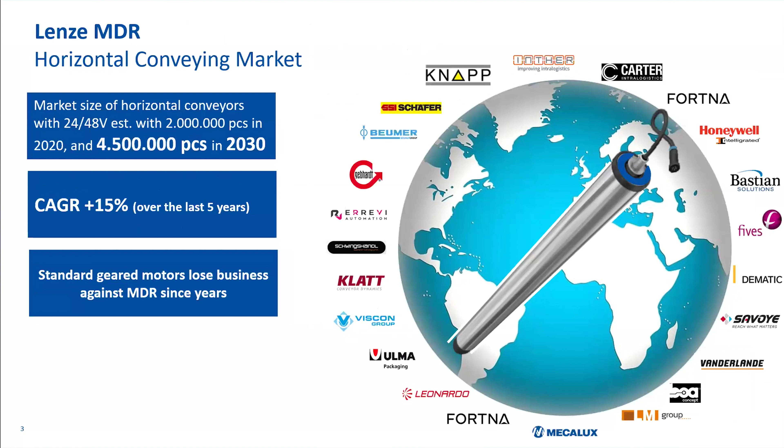Today, we're going to go through market opportunities, some product features and benefits, different applications and how to identify them, and sales tools. Throughout that, Steve and I will take you through a couple different product segments. I'm going to start us off with one of Lenze's newest product segments, which happens to be the MDR, the motor-driven roller. From a market standpoint, we see very large volume with this market.

In 2020, there were roughly 2 million pieces in the 24 to 48 volt horizontal conveying market, and that's expected to grow to 4 million or 4.5 million in 2030. So good growth, 15% over the last 5 years, and it's been taking more and more business away from standard geared motors. So we'll go through why that is and why Lenze decided to make an MDR in the coming slides here.

So the roller market, why do we see that it's growing so fast? There's a number of reasons. First, the intralogistic, the material handling market is growing significantly. And as that market grows, the need for more and more rollers is growing with it. Second, when we take a look at the power that's needed in that less than 200 watt range, DC is cheaper than AC.

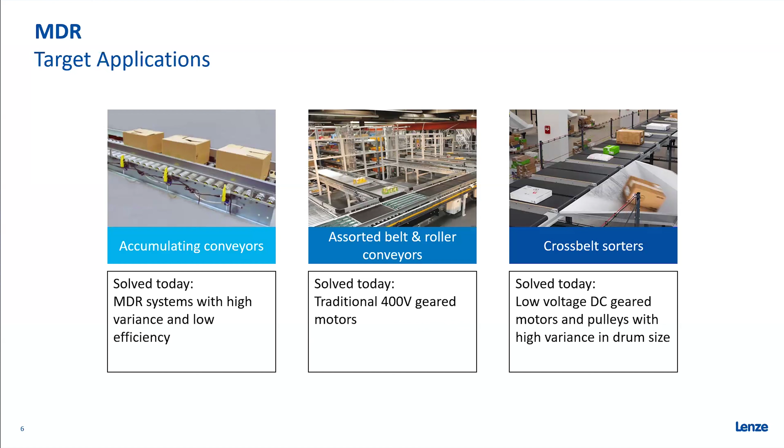For applications, there's a number of applications out there in warehouses currently. The first on the far left here, accumulating conveyors. These are currently solved with MDRs, but they have a high variance and they're lower efficiency than the Lenze MDR. In the center, you'll see assorted belt and roller conveyors. Today, that's solved with AC geared motors. They typically need higher power than what MDRs are providing in the market today.

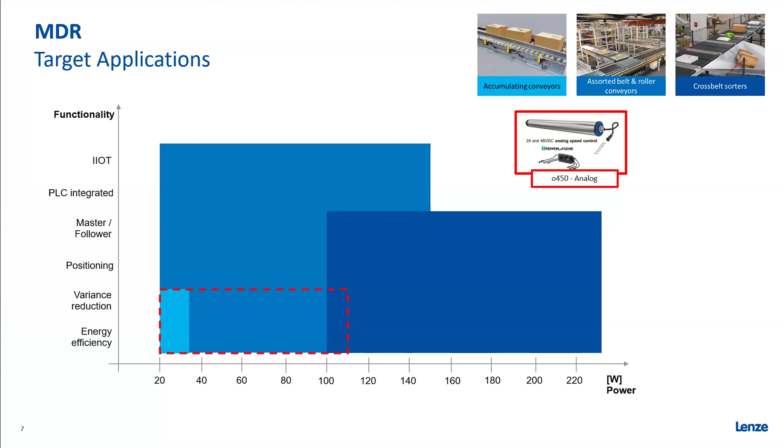And then on the right, cross belt sorters. These use low voltage DC geared motors with pulleys and a high variation in the drum size that's needed. Where we see the market going, kind of 2 steps with this. With the first release, Lenze will have an analog MDR. This will take over. We'll be able to use it for accumulating conveyors and some of the assorted belt and roller conveyors that are out on the market. So between 20 and 115 watts in applications where we're looking to improve energy efficiency and reduce the variance.

In the future, we'll also have a digital version of the Lenze MDR with its own control card. In this case, we'll be able to target more of the market where we can target the cross belt sorters and more of the belt and roller conveyors that are out there. So we'll go all the way up past 220, 230 watts of power. And from a functionality standpoint, we'll be able to have positioning, master follower, PLC integrated, and IIoT functionality.

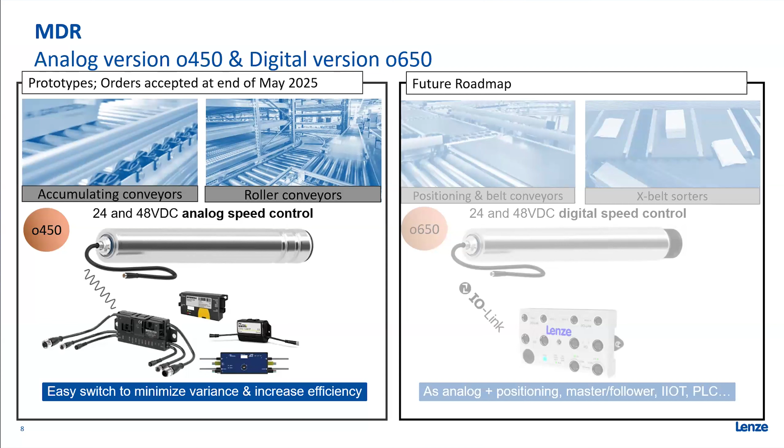Taking a look right now, we mentioned the two versions. On the left is what's going to be available soon. We can get prototypes out to customers for testing at the moment, and we'll expect to accept orders end of May 2025. We're providing the roller, and it's able to be used with control cards that are currently out on the market. Most that use an M8 connector would be compatible, but we can always take a look and make sure that they are compatible.

The future roadmap, the o650 on the right has the Lenze control card, and there'll be more on that as we get closer to the launch of that product.

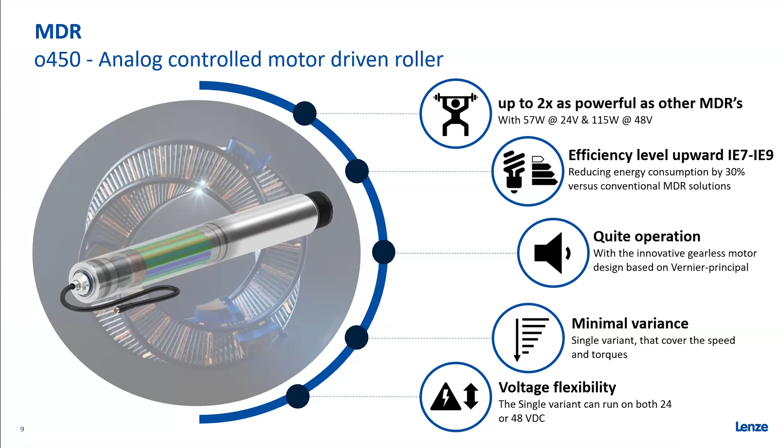For a final feature benefit for the MDR, we'll see up to 2 times as powerful than other MDRs out on the market, 57 watts at 24 volts, 115 watts at 48 volts with high efficiency. You can reduce energy consumption by 30% compared to other MDRs out on the market.

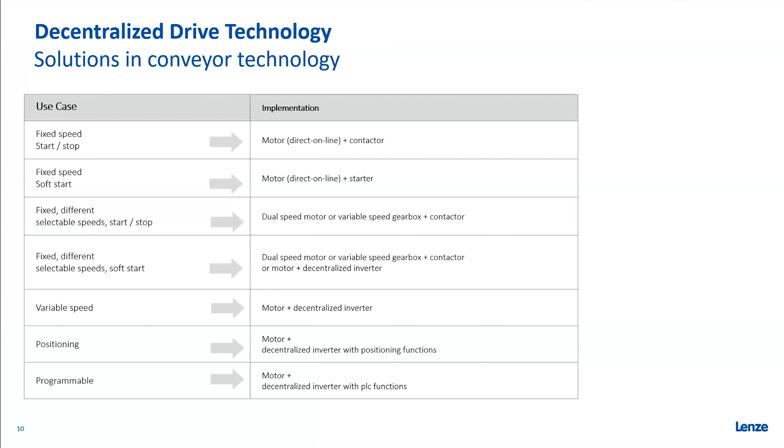And one of the more unique features is the quiet operation. It's the first thing that everyone seems to notice when you first install them. They're much quieter than what's currently out on the market. And finally, minimizing variance is probably one of the biggest benefits. We do that by having no gear, and then also having the flexibility for one roller to operate on either 24 or 48 volts.

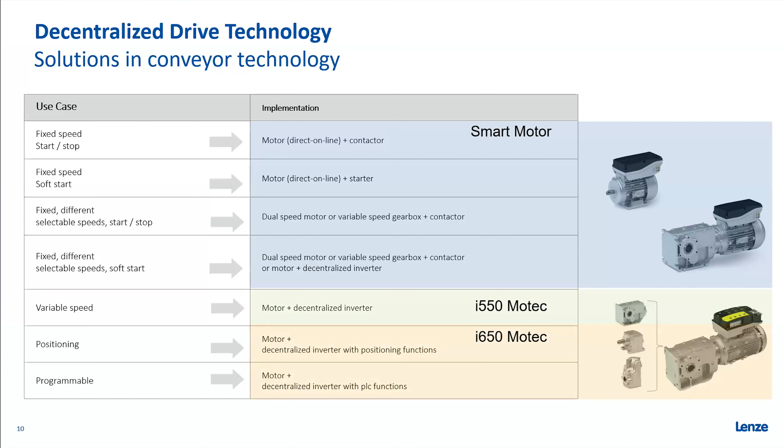Moving on, there's always more applications out there where MDR doesn't fit. So now we're going to shift to AC motors, VFDs, and Lenze's decentralized drive technology. From a use case, we'll take a look at the simple horizontal conveying applications out there where you have either fixed speed with start stops or soft starts, or a few selectable speeds. These are very good applications for the Lenze smart motor, made to replace things like soft starters or simple applications like that. And it was designed specifically for horizontal conveying.

As we get more complex, we have full VFDs that can get mounted to the motor or near the motor with our i550 Motec, which would offer variable speeds. And then i650 is a future-looking roadmap, which would offer positioning and programmability.

A little more detail on the Lenze smart motor. You can see that it's built directly on the motor. The motor supply is 400 to 480 volt AC, and we're going to utilize 3 digital inputs and 1 digital output. So you can have 5 different speeds that are set with the Lenze smart motor. You do this with either an Android smartphone, NFC using an app, or with a laptop connection. So very simple to program.

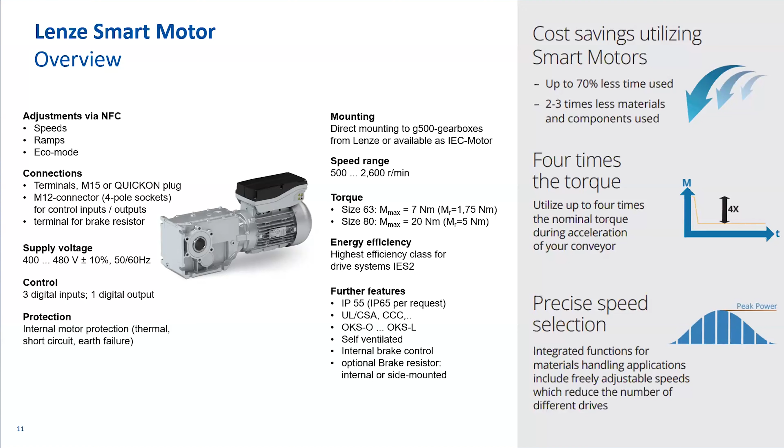We'll see that we can get a reduction in the variants with this as well. Using just a gear motor, you typically change the gear ratio to change your speeds out. This allows for simple speed adjustment and accel/decel adjustment without making different variations and stocking different gear motors.

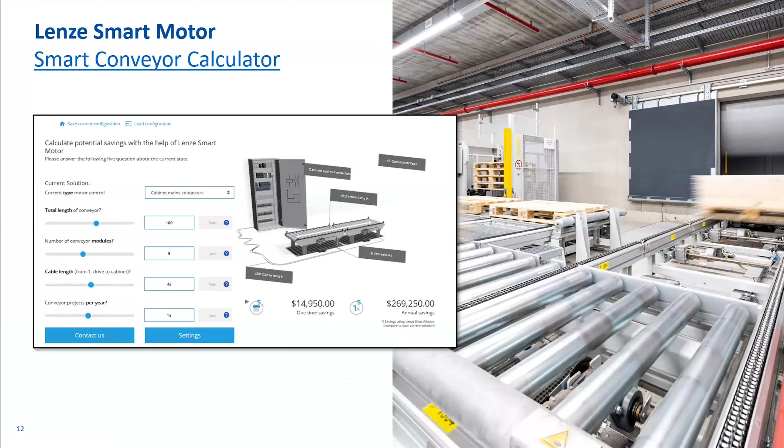And probably the biggest advantage of the Lenze smart motor is its 4 times starting torque. It's perfect for horizontal conveying when you're putting boxes on and taking them off. The starting torque is always where you need the most torque. It allows for a very compact package. The motor can be smaller than comparative motors without the smart motor on there.

We do have a smart conveyor calculator that's available on the Lenze website. It allows for a quick and easy calculation to see what cost savings you may see by utilizing the Lenze smart motor over what they're currently using. If you go to the Lenze website at the top for online tools, the smart conveyor calculator will take you to this page where smart motor flyers, manuals, mounting instructions are located.

And toward the bottom, you'll see the cost savings calculator with a few simple selections here. We can see what's currently used with either mains contactors, soft starter, or a frequency inverter. And then the total length of the conveyor, number of conveyor modules, cable length from the first drive to the cabinet, and then the number of projects per year. We can quickly see an estimate for one-time savings and an annualized savings.

That gets broken down into your drive concept. We'll see a negative here. Upfront cost of the smart motor is slightly higher than what's currently used, but we'll see a cost savings with power distribution, automation, the electrical cabinet, engineering costs, and structural costs. All of these details are under the settings tab.

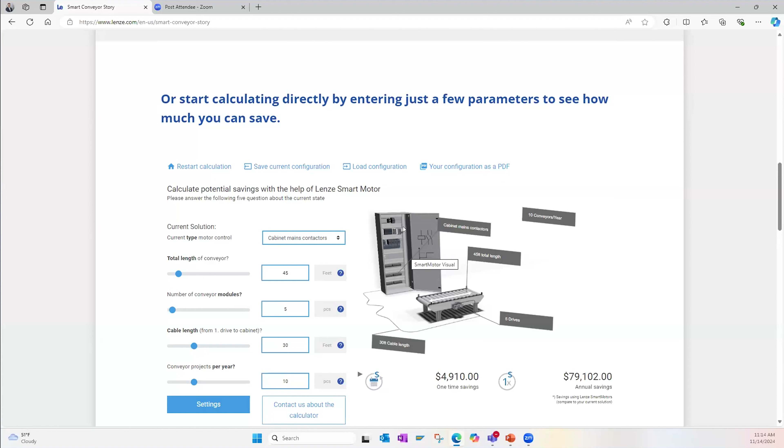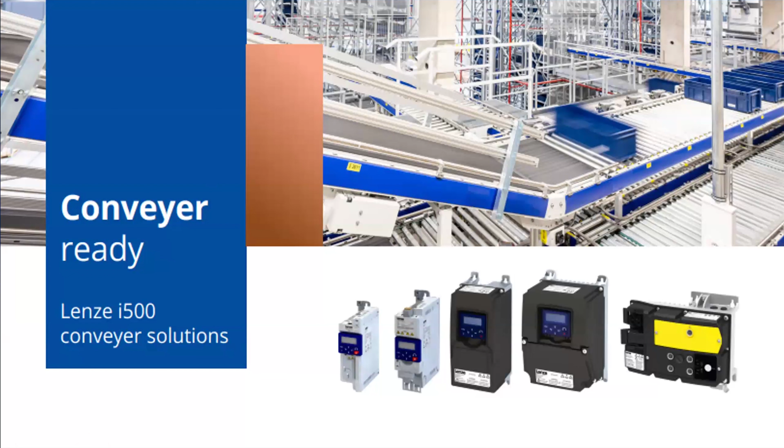We click on there. For each one of these, we can fine tune for a specific customer. What's the cost per hour for an electrician, the time to wire a motor, time for final testing. So for each one of these, we get into the details of the gearbox, the motor that's currently used, and so forth. And we can come to the cost estimate to see, does smart motor make sense for the customer? So one of the many tools that Lenze offers here to show the benefits of our products.

With that, I'll shift over and hand it off to Steve, who will take us through some of the VFD solutions we have for conveying. So we're going to quickly talk about our suite of VFDs and some features of these that are specific to the conveyance applications. So starting with our general portfolio, I'm sure many of you are at least familiar with these, if not intimately familiar, or at least aware of these product variants.

This is our whole i500 line of products. So starting from the left, we have our cabinet drives available up to 150 horsepower constant torque, 175 horsepower light duty or variable torque. The Protec in the middle, our premier decentralized product, gets mounted near the motor on the machine outside the cabinet. We provide that up to 100 horsepower. And the newest member is the Motec on the right side.

And that is in this photograph here, that's the wall mounted version, but we can put that on the motor. And we're making that Motec up to 60 horsepower wall mount, up to 30 horsepower motor mount. It's completely connectorized, decentralized, so really quick to apply in the field, quick to move, quick to replace if necessary, and really so far been very well accepted by the conveyance industries.

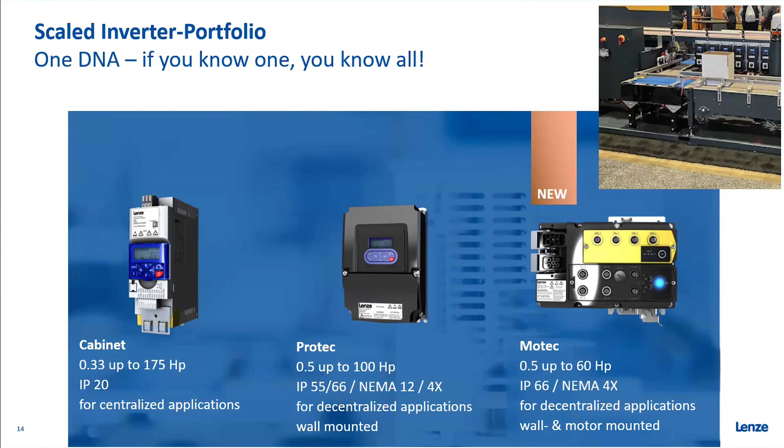Got a photo up at the top there, in the top right. We were at PACK Expo last week, and it was just a great showcase for a lot of our products that a lot of conveyor OEMs are using. You can see there a bunch of those Protec drives lined up for this sample conveyance application at PACK Expo, and that's really where the bulk of our portfolio for the conveyance industry are, in these decentralized products. So the Protec, like pictured there, but also the Motec.

And recently we've had some success with the Motec. We've gotten listed on the GM or General Motors specification with the Motec, as well as Amazon and Walmart. So if you have machine builders in your territories that you distribute to that build machines for Amazon, GM, or Walmart, you may get requests for Motec or Protec for those OEMs or those machine builders to meet the customer requirements there.

Just a brief description of what's the difference between these three series of products. So starting from the left again, those are cabinet drives. Have to go inside a cabinet. They're IP20 rated. They are modular, as you can see here. The control units are separate from the power units. You can easily apply different field buses to different power units, and it minimizes what you have to stock, and you can easily put something together for a particular requirement very quickly from your stock. Zero clearance mounting, side by side with no spacing, very compact, very efficient.

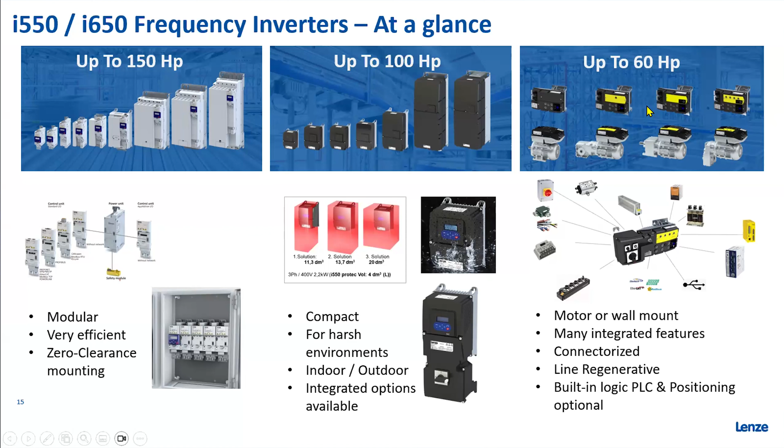Moving to the center here, we have the Protec that's available up to 100 horsepower. Still very compact, but it is outside the cabinet, machine mount, indoor, outdoor rated, very harsh environments. There's UV inhibitors in that plastic. It's a polycarbonate, so really robust and really great for harsh environments.

And again, over to the right, that's our Motec. And you can see up in the images at the top, several variants of the standard Motec, and then also the motor-mounted Motec. As I said, we'll be doing the motor-mounted version up to 30 horsepower and the wall-mounted version all the way up to 60 horsepower. Again, completely decentralized and completely connectorized.

Some of the features that are common throughout that entire product line with regards to conveyance. All these products can, of course, operate AC induction motors, open loop volts per hertz, open loop vector, closed loop vector. We can also control synchronous permanent magnet motors, open loop. All these products can provide 200% peak torque for starting for 3 or 4 seconds, 150% torque for 1 minute.

We offer a plethora of field bus connectivity. All the main modern Ethernet-based field buses, EtherCAT, EtherNet/IP, Modbus TCP/IP, PROFINET, as well as some of the legacy serial-based field buses like CAN, Modbus RTU, and Profibus.

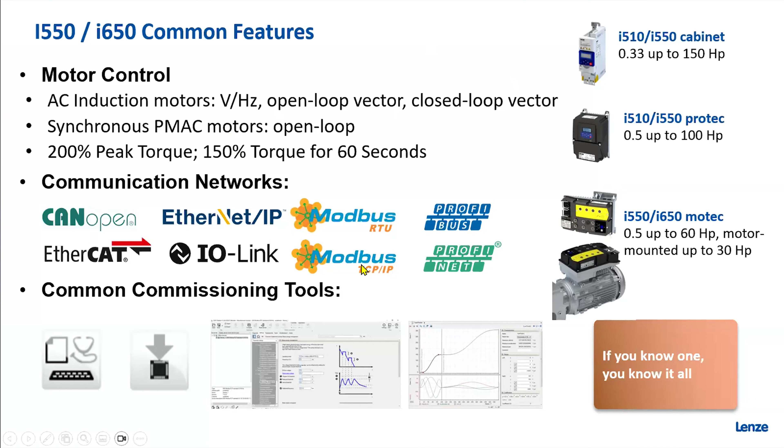Although these products look entirely different, they all use the same commissioning tools. They all have the same addresses or indices. So if you did start using our cabinet product, way back in 2016 when we launched it, and next week you decide to use a Motec for a particular application, even though it's brand new, it's got the same look and feel, the same behavior, the same addresses and register numbers you're used to. So the difference is really just the mechanical mounting, the location, the packaging, and connectorization. But at their heart, they're really just repackaging of the same product for particular applications and environments.

Some of the unique features of these products, especially with regards to conveyance. First one, of course, a hot topic for the last several years, energy savings. So we've incorporated an eco mode in all these products, particularly for the conveyance industry, when there is a light load or no load on the conveyor. It may still be running at its rated speed or at its set point, but there's no packages. There's no load on the conveyor.

All these drives, VFDs, can sense that condition, and they will reduce the motor voltage in those conditions. They'll keep the frequency the same, so the conveyance speed is the same. But the motor voltage will be reduced, and that amounts to a pretty significant energy savings. And this happens in milliseconds. So as soon as the load comes back or packages start being put back on the conveyor, that motor voltage goes right back up within milliseconds, and you're back up to full load.

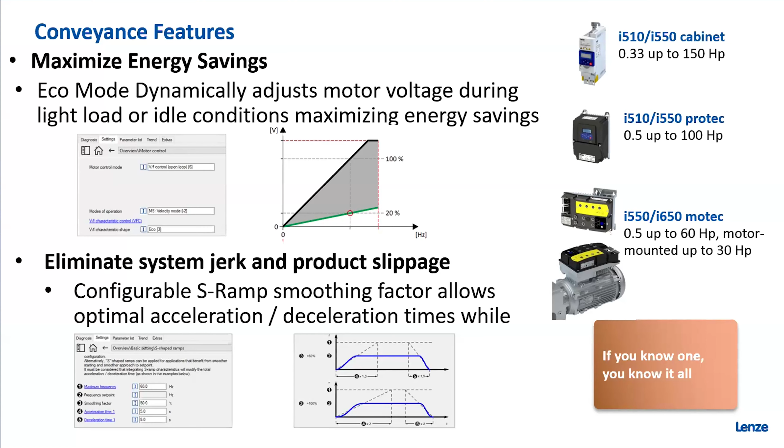We also have a configurable S-ramp. So configurable, in fact, that you could actually make what amounts to be a sinusoidal motion profile if you wanted to. So if you're moving fragile material or liquids or anything that would not benefit from a lot of jerk when the conveyor starts or stops, we have a highly configurable S-ramp that's very effective and completely configurable. Like I said, you could make it so it's a completely sinusoidal profile if you'd like.

Another great feature, we incorporated this a couple of years ago in this whole suite of products. You may see this called in some of our documentation a switch off positioning function. I think a more effective name is a repeatable stop function. So what we've incorporated here, if you turn this feature on, we can stop the conveyance in a very repeatable position, independent of the set point.

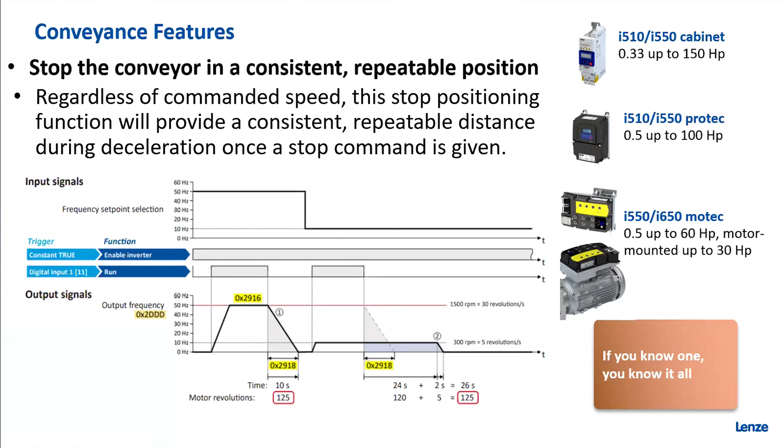If we switch to the lower speed, and then again we provide a stop command, we're going to delay the stop such that we still achieve the 125 motor rotations. So whether you provide a stop command from a fast speed or a slow speed, you're still going to get the same amount of distance or travel after the stop command.

You don't have to turn this feature on, but if stopping in a relative position is somewhat advantageous to the application, this is something that's built in. No need for an encoder. It's all calculated in our firmware to try to give you consistent, repeatable stop locations.

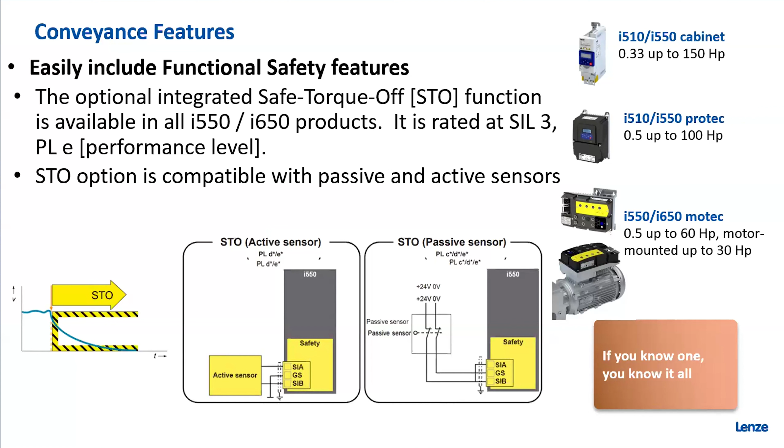Also, all these products have an STO or safe torque off function, so you can easily integrate functional safety into the conveyance. And we do have the highest rating you can get for STO, which is SIL level 3, performance level E. And our STO is compatible with active sensors and passive sensors.

And even with the active sensors, you could actually trigger a safe stop 1 after or before the STO if you'd like. So very compatible with the active and passive sensors that are on the market. Very easy to apply. It's a relatively low cost option if you want to just integrate the safety right into the VFD with all these products.

Just as much as the Motec can drive a motor, you can regen. So 100% regen continuously, 150% regen for a minute, 200% regen for 3 seconds. And just eliminate the need for brake resistors.

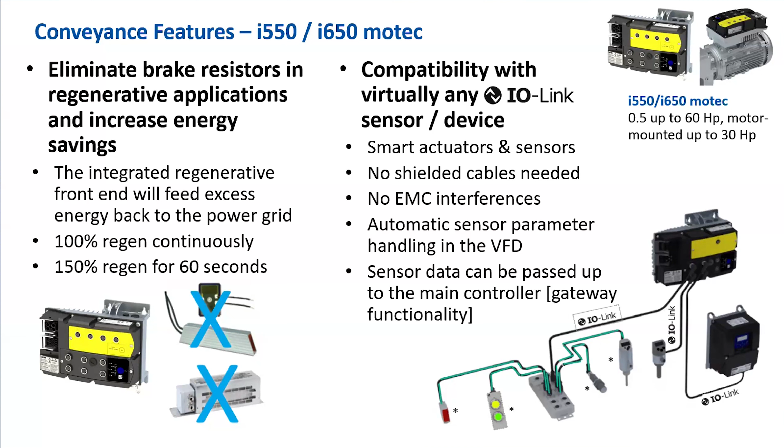Secondly, IO-Link compatibility. So a lot of conveyor OEMs are moving to these IO-Link sensors. It's kind of like the USB of automation. They're very plug and play, not sophisticated cabling, no EMC shielding required, very easy to apply. We offer a variant today of this Motec product where you can directly connect IO-Link sensors. So proximity sensors, temperature, lux, really anything. You're just limited by what is available in the IO-Link world, which is pretty significant.

And pretty soon, sometime in 2025, we'll have firmware for this Motec product that will do some positioning. And then that opens up a whole world of IO-Link encoders, incremental encoders, absolute encoders that you'll be able to take right into this Motec and do positioning applications.

So again, these are unique to the Motec specifically. These features are not in the Protec or the cabinet drive. But the Motec is really where we see our future going with the conveyance industries in general. So we did incorporate them into this latest product.